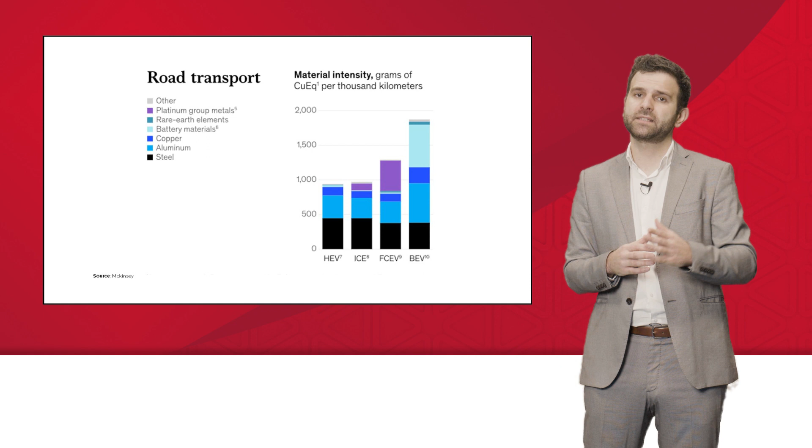As the new industry gets more and more complex, there are new ways of work. Let's take a look at the most relevant insights for the near future of the industry. Advanced materials: the adoption of advanced materials such as composites and superalloys in various industries has led to increased demand for cutting tools with specialized geometries, coatings, and materials that can efficiently machine these challenging materials.

Customization and tool specificity: the demand for customized tools and tooling solutions tailored to specific applications is on the rise, driven by the need for improved performance and productivity in various industries. Additive manufacturing: the emergence of additive manufacturing, 3D printing, is creating new opportunities. Tool coatings: the development of advanced coatings such as PVD or CVD coatings has improved tool performance, wear resistance, and tool life, allowing better productivity and cost savings.

High-feed milling, which we have discussed in this event, has gained popularity due to its ability to increase material removal rates, reduce machining times, and improve tool life. And, of course, Industry 4.0 and digitalization: the cutting tools industry is embracing digitalization and Industry 4.0 technologies. Lastly, green manufacturing: the cutting tools industry is increasingly focusing on sustainable and eco-friendly manufacturing processes.

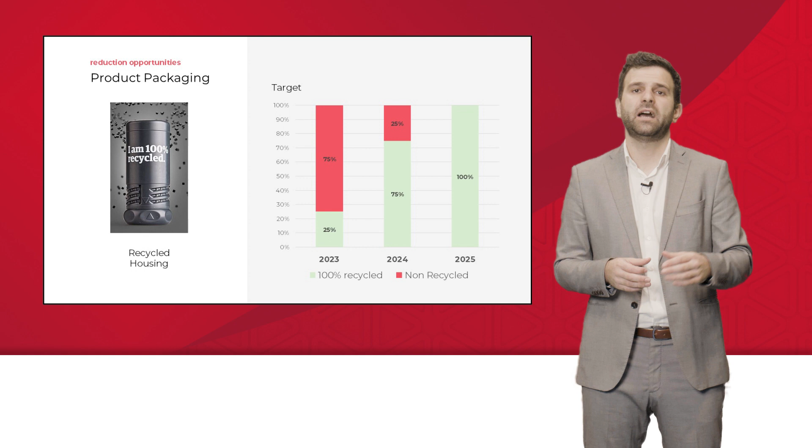But how is Palbit managing the change? We want to give you some good news about this. By the end of 2023, 25% of our product boxes will be 100% recycled. This path will continue until 2025, where we'll have 100% of plastic boxes made by 100% recycled plastic. This will be integrated into our sustainable path, because we are tooling for sustainability.

Hello, welcome to the Interactive Tooling Days of Palbit. My name is Bruno Nunes and I am the area manager of Palbit responsible for the German market and the UK market. Today we will talk a little bit about turning of heat-resistant superalloys and titanium. We will see exactly what heat-resistant superalloys are, how big the global market is, and in what industries you can find more of this type of material. After this, my colleague Francisco Marques will talk to you about the best geometries, grades, and solutions available in Palbit to machine heat-resistant superalloys and titanium. So let's start.

What is heat-resistant superalloys exactly? This is a group of materials called ISO-S according to the ISO codification, which can be divided into heat-resistant superalloys and titanium. Inside heat-resistant superalloys, we can find basically three main groups of materials: nickel-based, iron-based, and cobalt-based materials. These materials are difficult to machine in general because they are sticky, create build-up edge, and generate a huge quantity of heat. But probably the main reason for the demanding cut on this group of materials is because they retain high strength at high temperatures.

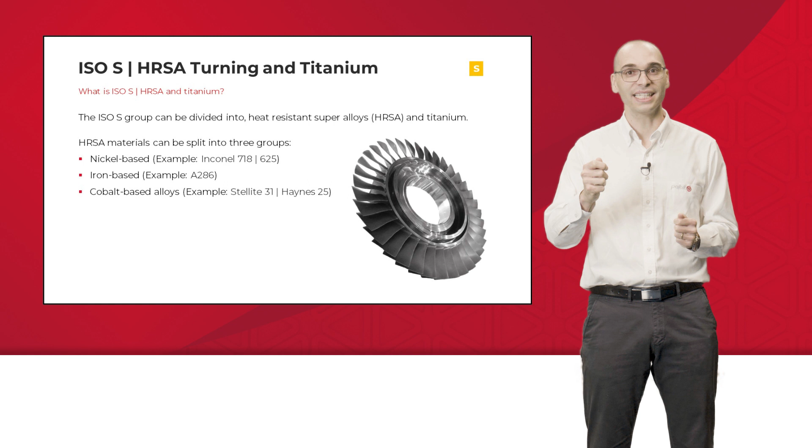All these materials have high strength at high temperatures and produce segmented chips during cutting, which create high and dynamic cutting forces. Because of all these challenges, optimized tools are naturally a prerequisite, but equally important is how to apply them.

In this presentation, we will guide you through the most common materials and machining applications. We aim to give you applications and process recommendations that will help you use our products in the most productive manner with maximum component quality.

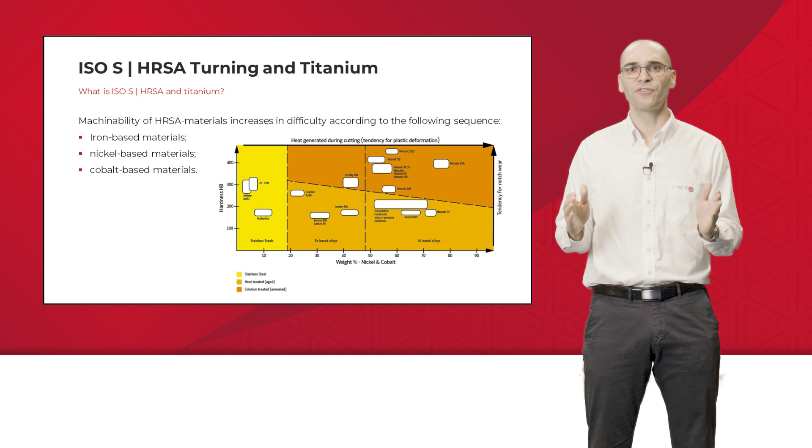But before we talk about our tools and how you should use them in a proper way, allow me to show you some figures about the market of heat-resistant superalloys and titanium.

This is one of the reasons why Palbit is investing and innovating in turning solutions to machine this type of material. Another reason for Palbit's strong investment in recent years is the incredible challenge these materials present. Not all producers are able to fulfill the requirements to enter this type of industry. Palbit has shown in recent years that it can be a reliable supplier in turning solutions to machine these materials.

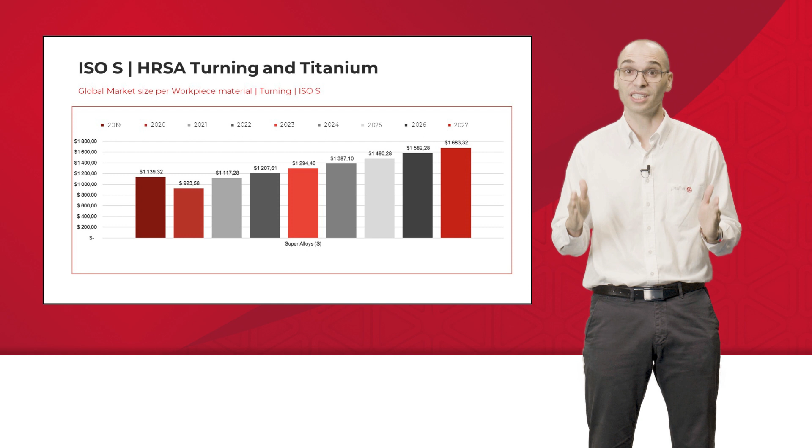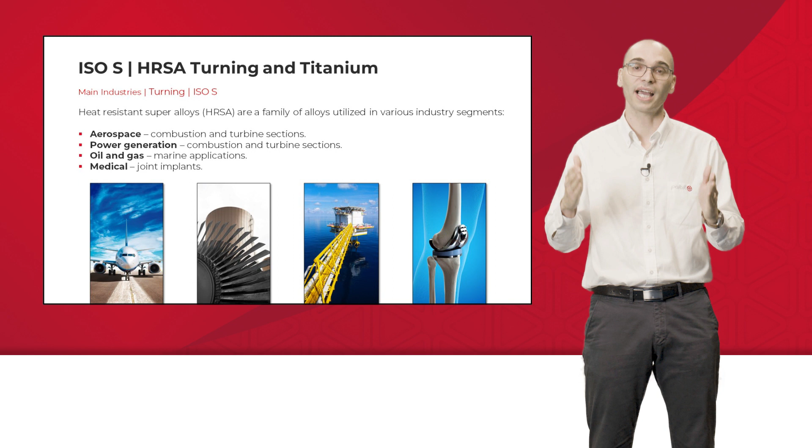Let's talk about the main industries that have the highest consumption of heat-resistant superalloys and titanium. We are talking about, for example, aerospace, power generation, oil and gas, and the medical industry. The properties of these materials which make them attractive for these industries are mainly the retention of strength and hardness at high temperatures, and corrosion resistance, which is important, for example, for the oil and gas industry.

As we saw in the previous slide, the main industries for these workpiece materials are aerospace, medical, oil and gas, power generation, and we can add also defense and military industry.

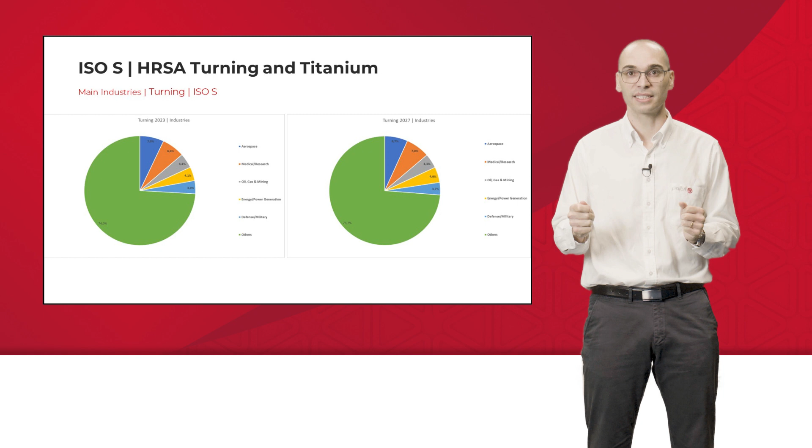On this slide you can see the same, but in percentage. On the left, the percentage for this year, and on the right, the forecast for 2027. These 5 main industries for heat-resistant superalloys and titanium - aerospace, oil and gas, power generation, defense and military - combined represent more or less 25% of the total market. So it's a big market that we can and should explore together.

In the next minutes, my colleague Francisco will show you all the solutions that Palbit can offer for machining these challenging-to-cut materials. But allow me a last word to tell you that in recent years, Palbit has invested heavily in tools capable of high performance and high productivity on machining of heat-resistant superalloys and titanium. Our firm commitment is to continue to invest in this area and lead the market in the coming years. Together with you, Palbit will shape the future of heat-resistant superalloys. Thank you and see you soon.

Hey, I'm Francisco. I'm an application engineer at Palbit, and I'd like to take over from Bruno now and get a little into why these superalloys are so difficult to machine, and also what are some of the solutions that Palbit has come up with to try and mitigate some of the problems they bring about.

So Bruno made a little introduction into these materials and their machinability, but just to bear down on it a little more - what makes them so difficult to work with?

First off, they're usually pretty strong and pretty hard as well. But maybe they're not the hardest or strongest materials you work with - what makes them special is the fact that they retain those abilities even at high temperatures. So you can't really expect that as you turn, as the workpiece heats up, the material gets softer. This doesn't really happen with these kinds of alloys.

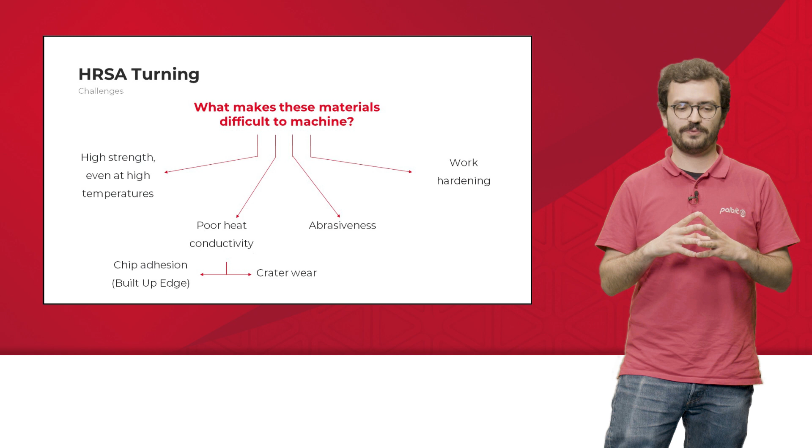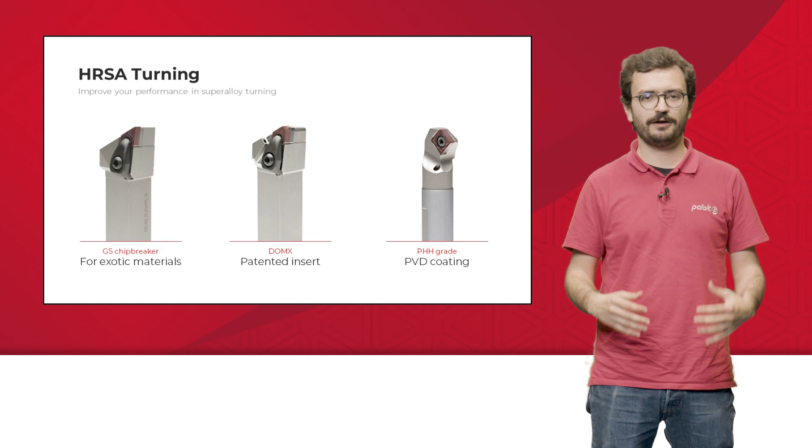So we at Palbit came up with a three-way approach to improve performance when turning these materials. On the one hand, a brand new chip breaker design, which we will apply on standard shaped inserts. We additionally went for a completely new insert concept, new shape, and we topped it all off with a brand new PVD coating. So first off, this new chip breaker design, how does it work, why does it work so well?

Well, we introduced a larger rake angle than usual, which we hope will decrease your cutting forces and reduce the heat generation. And we paired that with a sharp cutting edge, which should give you a lighter cutting action and decrease that work hardening effect.

Now additionally, as I mentioned, these are negative inserts. And negative inserts have the advantage of allowing you to keep a larger cutting edge angle and therefore make that edge a lot more robust. Furthermore, the chip breaker design itself is also a bit different, as these alloys usually create serrated chips, which are a little different from the continuous curling chips you might find on steels, for example.

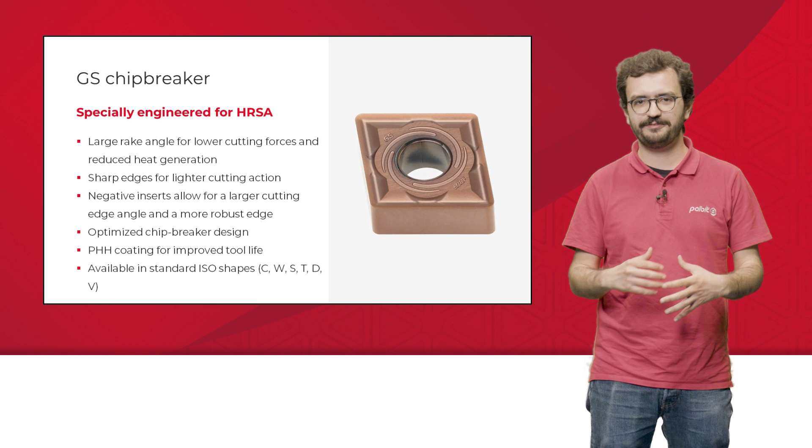Of course, we pair this up with our brand new PHH coating, which significantly improves tool life. This chip breaker is applied on all standard ISO shapes, like your rhomboids, your C's, D's, and V's, but also square and triangular inserts as well.

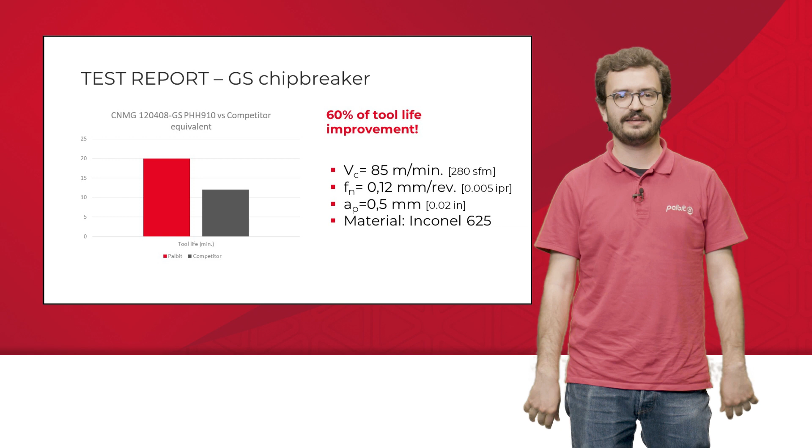Now, for a test report, we try to compare our GS chip breaker insert with the PHH coating against the competitor equivalents on turning Inconel 625. In this, we saw an impressive 60% improvement in tool life.

Now, additionally, we also introduced a brand new concept for an insert, which we've been calling DOMX. Now, as some background information, as you probably know, tool holders with small entering angles, usually in the 60 or 45 degree range, cause an interesting phenomenon known as chip thinning. This chip thinning allows for higher feeds, which translates into much higher productivity.

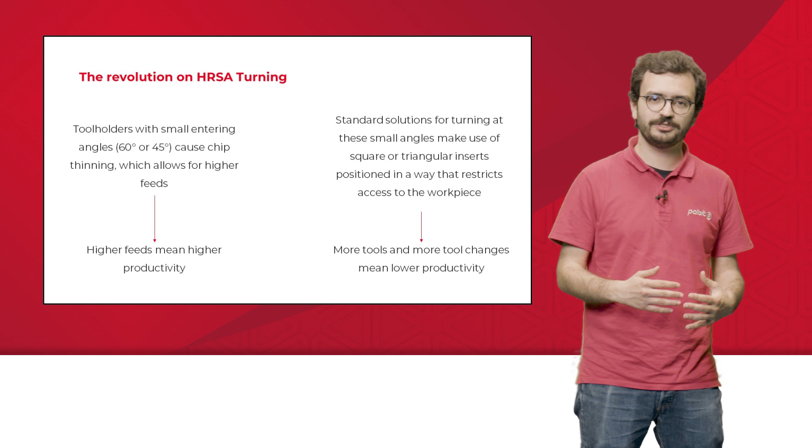However, these same tool holders also make use of either square or triangular inserts, which are positioned in such a way that access to the workpiece is restricted, especially when you are trying to turn up to a shoulder. Now, this forces you to have more tools and more tool changes in your programs, which lowers your productivity.

So with this in mind, we try to come up with a way to combine both the small entering angle concept and its advantages with a tool that allowed for greater access and versatility. Out of this combination, we arrived at DOMX.

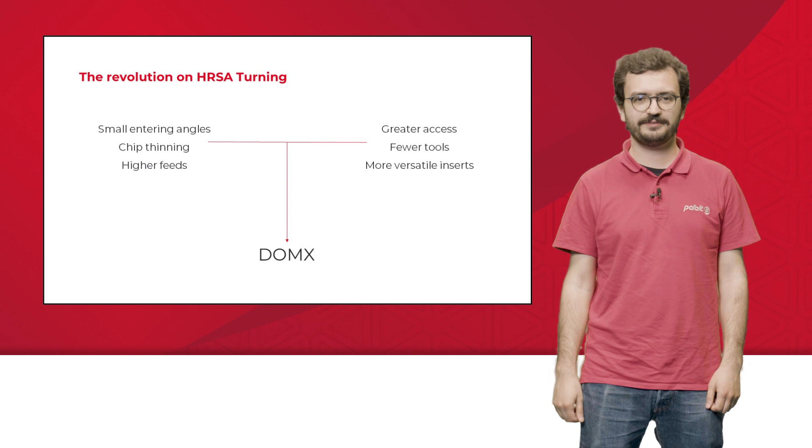Essentially, DOMX is like a DNMG style insert, and it mounts at the standard 93-degree entering angle tool holder. However, it has a special cutting edge profile that enables it to cut at a 45-degree entering angle. This way, we combine the best of both solutions.

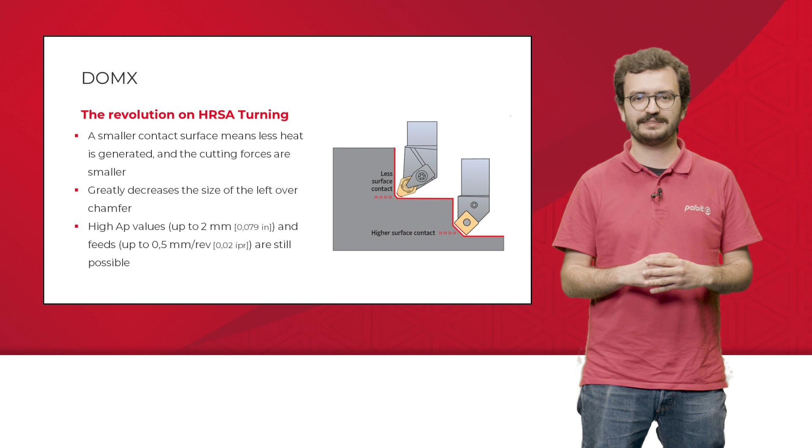DOMX cuts like a square insert, but improves your access to the workpiece, especially when you're turning up to that shoulder. The smaller surface contact also reduces heat generation and cutting forces. And you can still use high depths of cuts and feeds. In short, DOMX combines high feed capabilities with minimal sacrifices to accessibility.

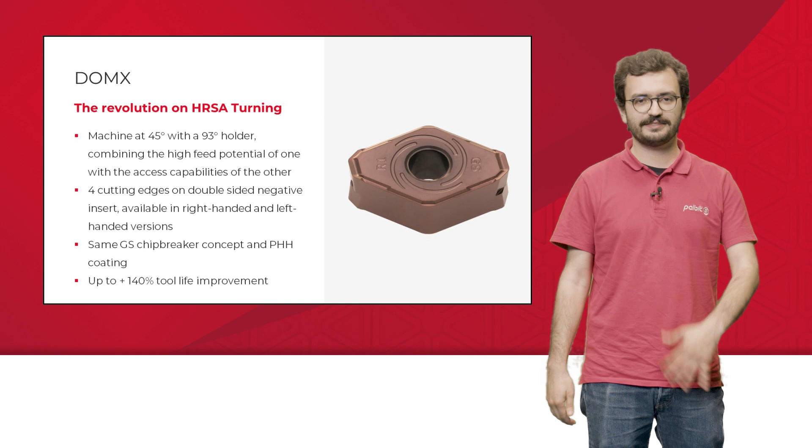And even though the special profile of the insert is asymmetrical, they are still negative and double-sided. You just have to choose between left-handed and right-handed inserts. The chip breaker itself is designed with the same considerations in mind as the GS inserts, and it's also paired with our brand new PHH coating.

Again, in a test report, we found remarkable tool life improvements when turning Inconel 625, this time up to 140%.

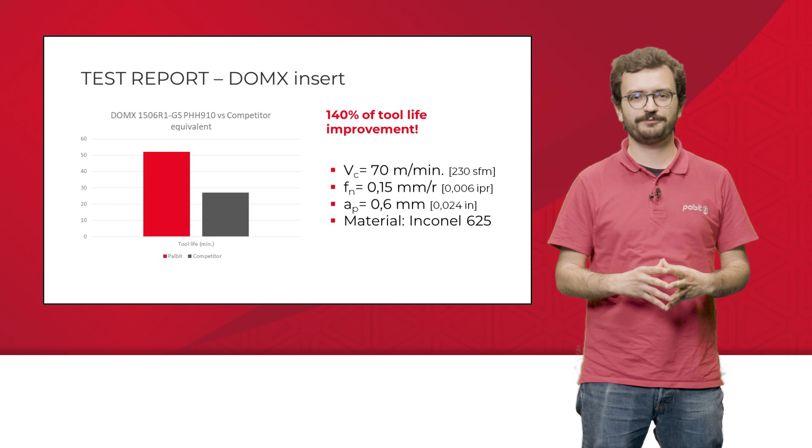Lastly, a new PVD coating was also developed. This thin, single-layer coating boasts great heat resistance thanks to its high silicon content. This allows it to withstand the temperatures you might encounter when turning super alloys.

The coating is usually paired with one of two hard metal substrates, either as PHH 910, the harder of the two, and the first choice for turning these materials, or PHH 920, a tougher grade, more suitable for interrupted cutting.

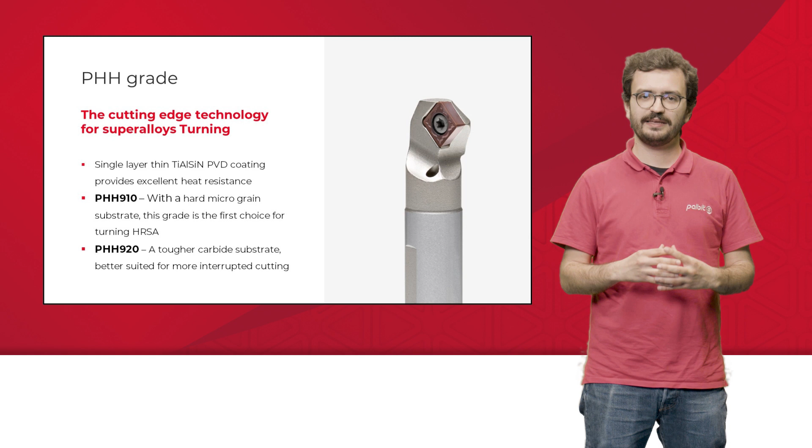Even by itself, this coating already improves tool life considerably. In testing, we found increases of more than 30% when turning Inconel 718.

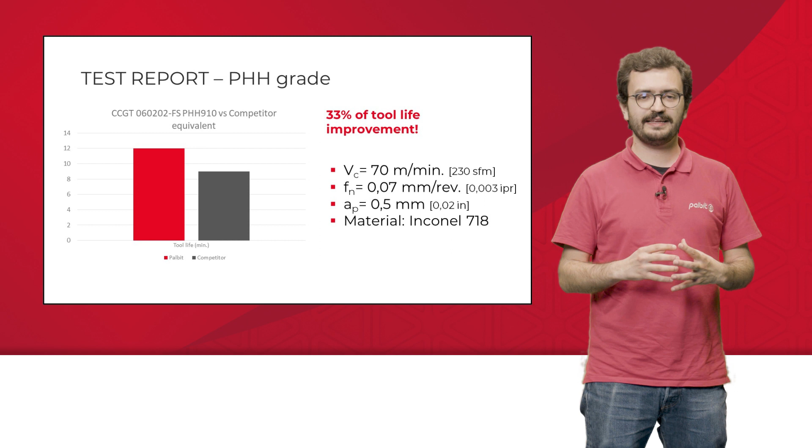But we're still adding new items to our superalloy solutions. Soon you can expect to find the new GSF chip breaker, specially designed for finishing operations. We increased the rake angle and created a special cutting-edge shape, which we paired with a redesigned chip breaker. Furthermore, these negative inserts will be provided with a 0.2 mm corner radius, making them ideal for finishing.

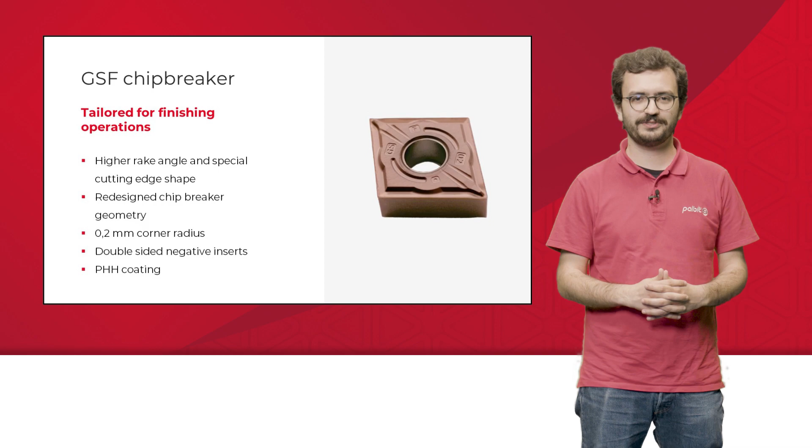For decades, aerospace has been an industry defined by growth. There have been crises over the years, but never one so deep and heavy as COVID-19. Now that the markets have returned to the levels of growth of the past, how can aerospace manufacturers get back on track? The answer lies in more sustainable manufacturing.

Projections estimate the industry will be back to where it was pre-crisis in the next 2 to 3 years, and Palbit is well positioned to lead this recovery. During this presentation, we will show you all the tools and solutions that Palbit developed in recent years for the aerospace industry. But before we talk about our solutions and how you should use our tools properly, allow me to show you some figures about the aerospace market.

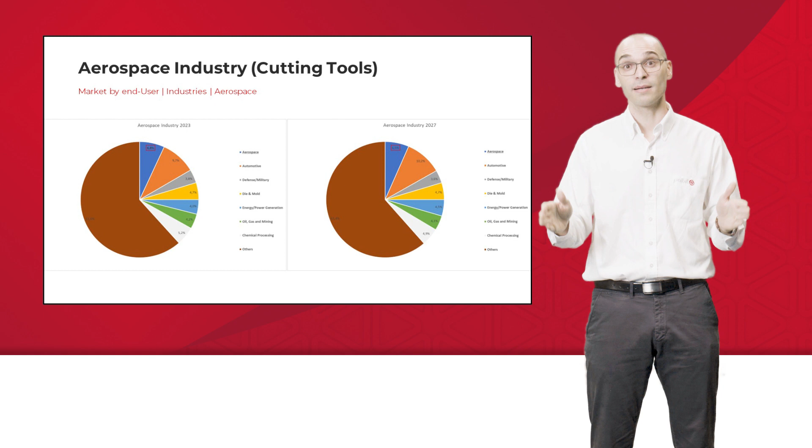On this slide, you can see the same thing, but in percentage. The aerospace industry represents 6 to 7% of the total market. On the left, the percentage for this year, and on the right, the forecast for 2027. A percentage of 7% may not seem like much, but there are few producers that reach the prerequisites of the aerospace industry, and Palbit is one of them.

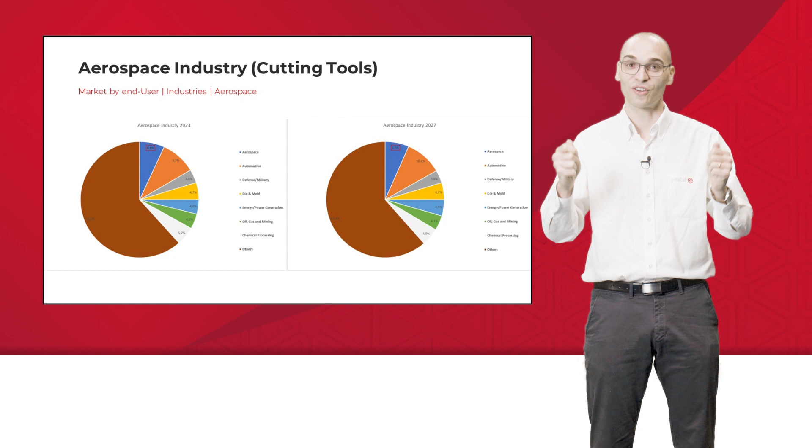The aerospace industry faces challenges in the coming years around weight, noise, emissions, and achieving higher efficiency with lower consumption. There are different ways of approaching these challenges. Alternative fuels is one of them. New engine types are another possible solution.

Palbit is aware of these changes and challenges in the aerospace industry, and in recent years has invested heavily in solutions capable of reliable performance and high productivity in the aerospace industry, as you will see in the next few minutes with my colleague Francisco. Together with you, Palbit will fly on the wings of change and will shape the future of the aerospace industry. Thank you, and see you soon.

So, the following overview is just that, an overview, but it should paint a broad picture of the kind of solutions Palbit offers when turning heat-resistant superalloys. These alloys, when used in the aerospace sector, are mostly applied to engine components required to withstand very high temperatures. Common parts include blisks, fan discs, and shafts.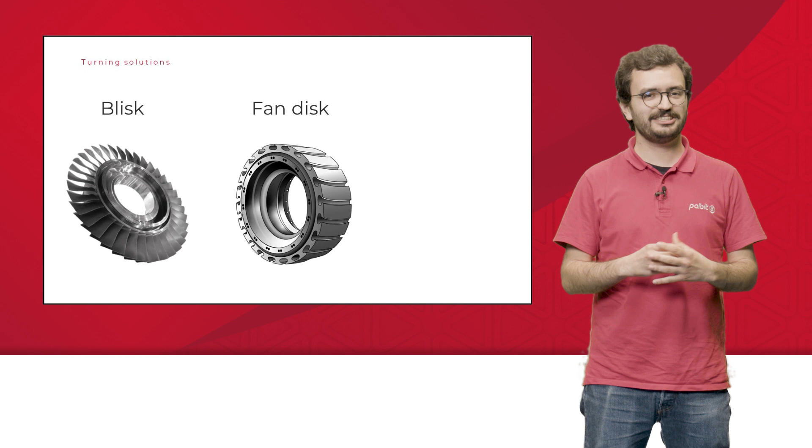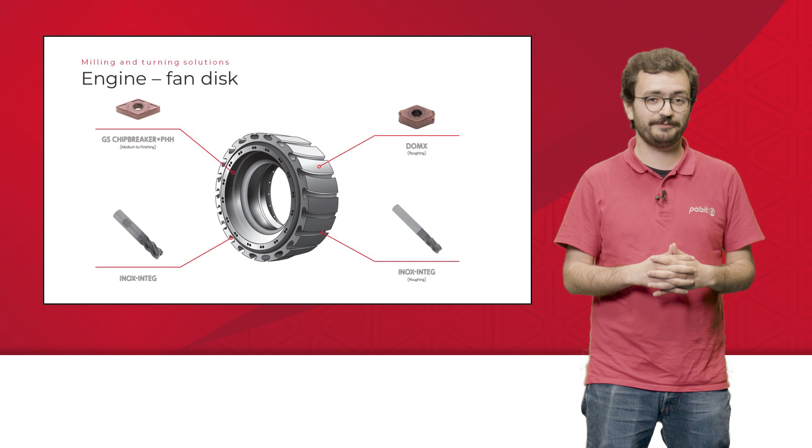Generally speaking, the DOMX is of course your ideal choice for roughing passes, thanks to its ability to perform even at high feed rates. However, for more general turning and, depending on surface finish requirements, even finishing operations, a standard negative insert with a GS chip breaker and a PHH coating would be our first choice.

Of course, Palbit also offers a very wide range of PCBN inserts, which could be an interesting alternative. This very hard material may allow you to run your finishing passes at a much higher speed than carbide. Lastly, Palbit also offers that same GS chip breaker in an RCMT insert. Round inserts can be a great solution when turning these very difficult to machine materials.

If you have a good grip on CAM software, you can implement some very interesting trochoidal turning strategies. In these, you are dipping the insert in and out of the cut, never letting the temperature rise too much, and you're turning the tool holder around to distribute the wear across the edge much more evenly. Of course, if you have any suggestions or questions about specific applications, feel free to ask us. That's all I have for you today, but thank you.